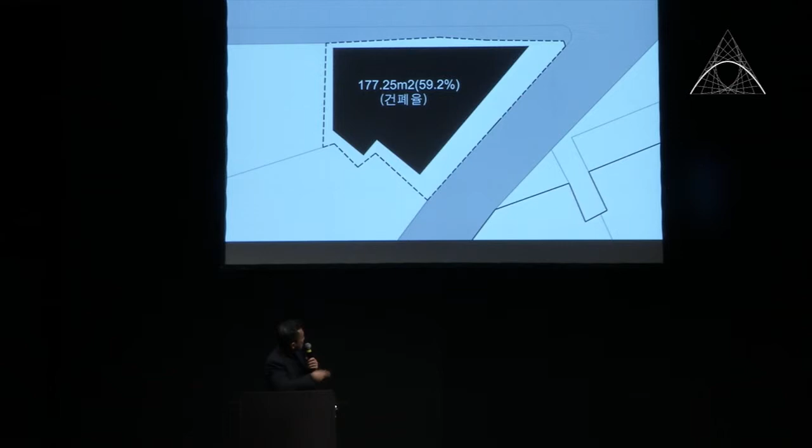This is also a very important factor, because the site itself is also a quite unique shape, about 300 square meters. The building I was pointing out across the street is the birthplace of the second Korean president, so it became a landmark, although it's not an important traditional house — just because of the person who was born there. So we had to follow the restriction of 27 degrees to protect this view from the garden. This area was designated for 150% FAR, but we were only able to build about half of it.

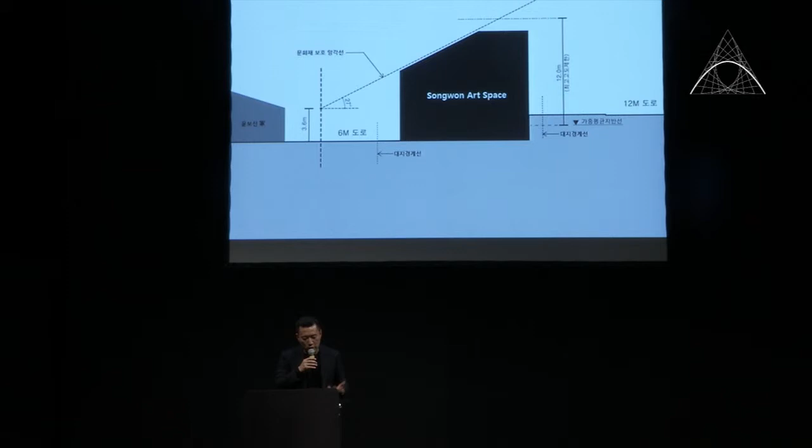The reason the client wanted a new building was they needed a larger space for art exhibition, so that was a primary challenge. This is probably a prime example of a context-driven masterpiece, the Flatiron Building, but of course that triangular shape is maybe 50 times larger than our site.

And then we got this site, much smaller, and it also has a 3-meter drop. So it's almost like you don't have to do anything to create a form to maximize it, and it became quite a charming shape, we thought.

What we suggested to the client was, since they couldn't build the area they wanted for the gallery, what if we put it underground, since you can build more than 60% site coverage. So the corner has a window that lets you look down 8 meters deep - that's the art gallery. This corner becomes more of a social and meeting space for this small non-profit art space run by a corporation specialized in steel manufacturing.

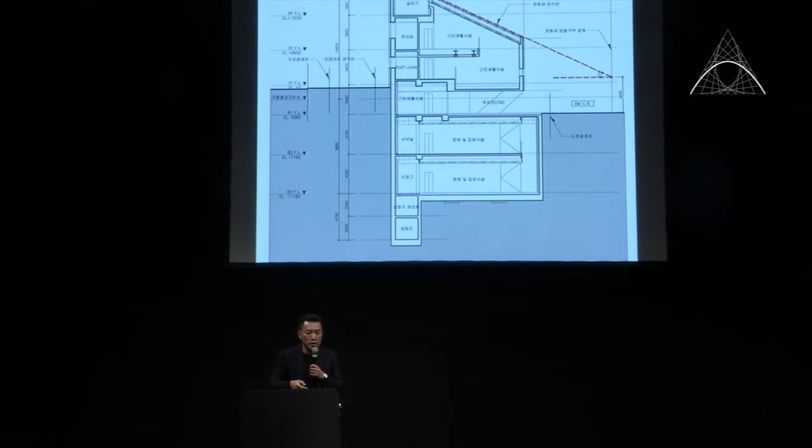You can see here there are 2 levels of basement, so it's actually a 5-story building, although it doesn't appear that way. The middle floor is semi-underground, semi-above ground because of the level change. We barely managed to squeeze in 7 parking lots, which is required proportionally to the area.

So you have this concrete space, which is also quite nice when it's empty, and usually used as the entry for the gallery space. What you're looking at is an opening here, then the gallery, and then this is a kitchen for the restaurant upper level.

What you're looking at we call structurally a 'silent acrobat.' When we tend to do a structurally challenging building, we try to make it very showy - maybe, you know, if architecture is like a frozen dance, it's more like a ballet, there's a kick and it's defying gravity. But this one doesn't look that way, yet it's strangely supported by these things - this is actually a major beam spanning the triangular shape.

This is just an envelope, and this whole thing is a beam. It changes its appearance, and you can see from here that almost half of the building is floating.

We thought it was very important to lighten up the corner, because we were a little apologetic about occupying that part - although before it was really to the edge, like a stone retaining wall. Another challenge was that since it was a steel company, they asked us to use their product, and we thought we could maybe make the whole building out of steel, but that wasn't really feasible, especially when you dig so deep.

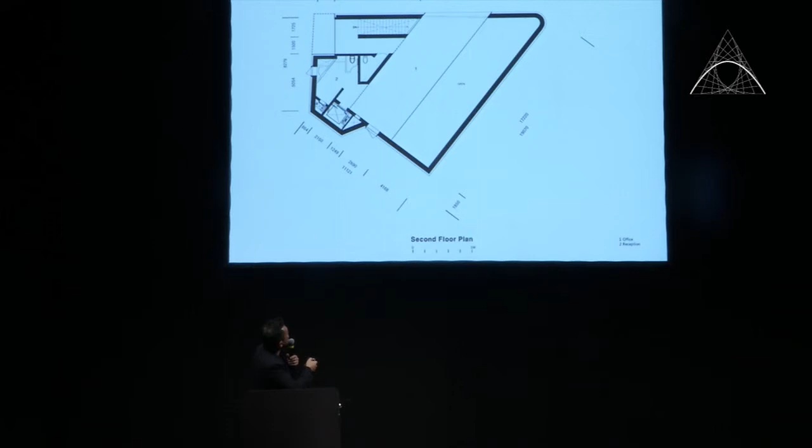The major beams are 4 centimeter thick steel—again, we use a lot of steel. Below is what goes perpendicular, a horizontal line which is a mullion. Then there's another layer running east-west so you can block the sun, and also expanded metal in between the glasses on top. So you actually get quite nice patterns during the day.

This is the office, and you're looking at the restaurant below. You also have a great view of this corner, and the person can look up easily. You can get the whole idea looking down 8 meters and then 11 meters above, so you almost have this 20-meter vertigo experience in a strange way.

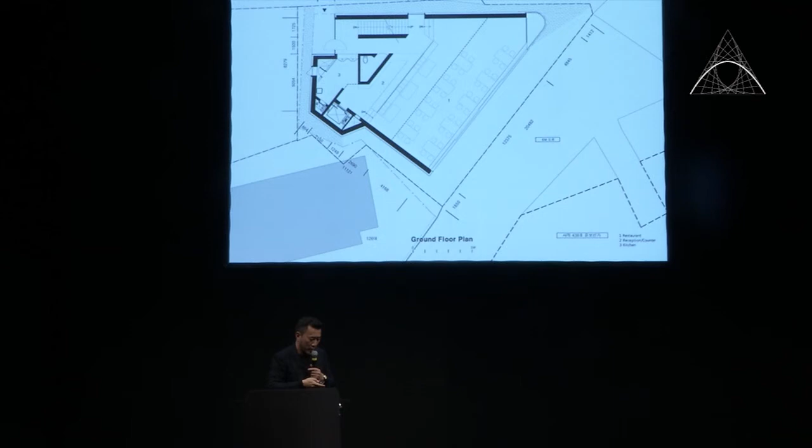And this is a French restaurant. It didn't take us much to convince our client to do this French thing, because they are very respectful of our opinion, but also they actually live like 2 doors away—they're real locals there.

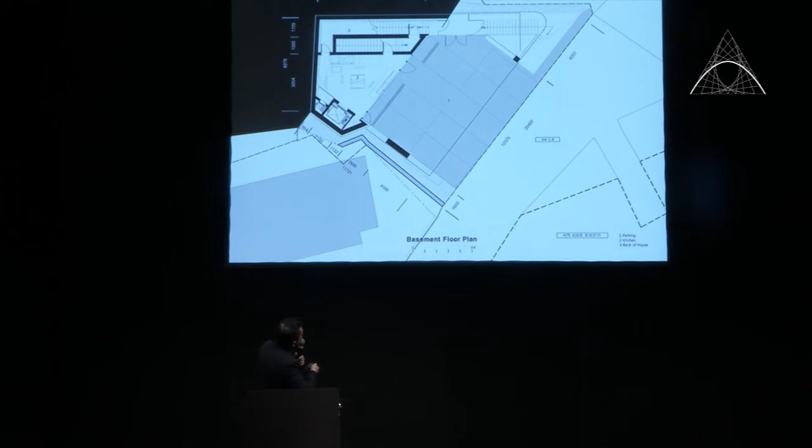It often becomes quite a destination for gatherings, as many as 70 people. Then you're looking at 7 parking lots and the kitchen behind. And this is how you enter.

And this triangular wall is doing very heavy weightlifting duty. You can see the street level person passing through.

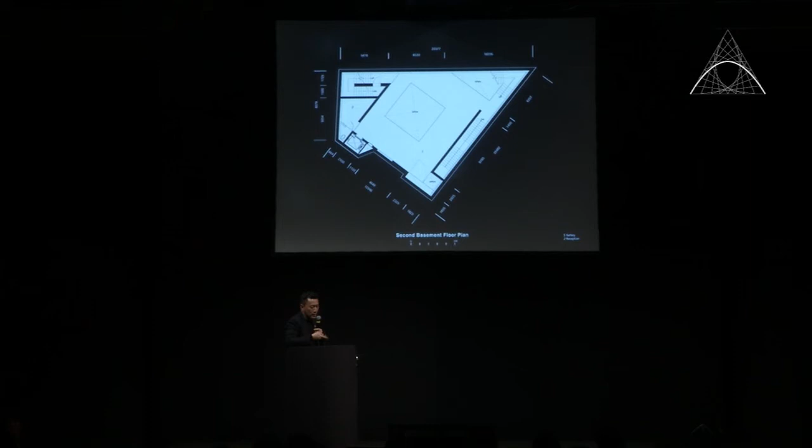And this is the basement, the second basement. You have a void in the middle, and the side shape is strange, but we tried to make it as easy and neutral as possible.

And the bottom is the widest floor. Also, nice thing is above here is a street level. Typically you go to an art gallery and have this high space with a skylight, but this one is actually reversed—you're like an angel descending from the skylight, and it's become quite a unique experience.

I'll show you some of these. It's been almost 2 years, and for us, architecture is really not a goal. I think it's what divides before building and after building—it has a sort of nice performance ability.

This gallery is devoted to contemporary Asian and Korean art, and they also have a residency program. There are some artists using our stairwells, and even this was actually a very exciting moment.

In between exhibitions, there was a performance festival, and it was like a totally empty space. They used it in a way where the audience can only be above and look down, and it was actually a very intimate experience.

Some Korean well-known pop artists had a group show, and so on. Then this one is a Chinese artist—he's quite famous, and he came and was very inspired. Apparently he measured everything so carefully about this 2-story space, and actually built a replica in his giant studio.